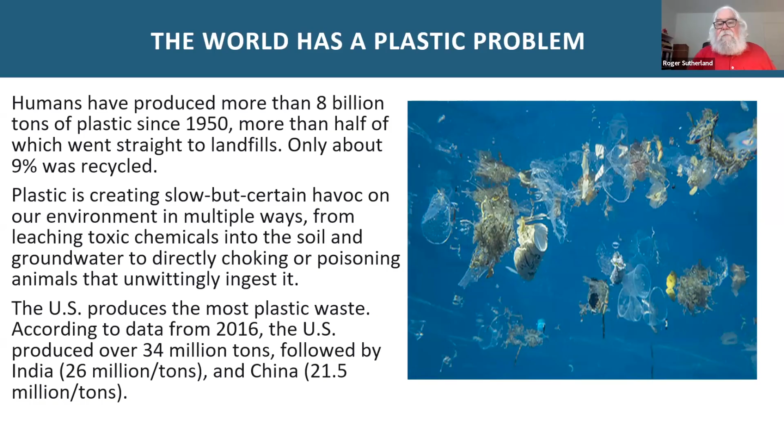Plastics are a problem not only because of the toxins they contain throughout their manufacture, but also the fact that they can be ingested by aquatic life and create all kinds of issues. What's really interesting is that the US produces more plastic waste than any other country - according to the data, over 34 million tons, followed by India and China.

There's a nice graphic of what the plastic looks like floating in the ocean. So there is not only a plastic problem, but the world has a plastic pollution crisis. Most studies report that people eat or drink an estimated 39,000 to 52,000 microplastic particles every year, and if we include inhalation, that number goes up dramatically.

Plastic accumulating in our oceans and on our beaches has become a global crisis. Billions of pounds of plastic can be found in swirling convergences that make up about 40% of the world's ocean surfaces. At current rates, this is just unbelievable - plastic is expected to outweigh all the fish in the sea by 2050.

So the next thing we need to do is ask ourselves: what can be done about this? Street sweeping studies over the past two decades have targeted a variety of pollutants found in our waterways, including nutrients, heavy metals, and toxics. We now have data suggesting we're doing an excellent job with all of these things.

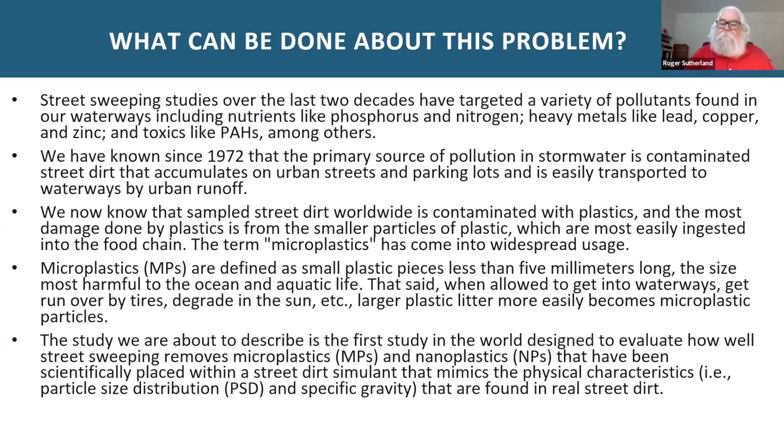So the study that we're about to describe is the first study in the world designed to evaluate how street sweeping removes microplastics and nanoplastics, which are smaller versions of the same, that have been scientifically placed within a street dirt simulant that mimics the physical characteristics found in real street dirt.

So before I get into the study, I just want to back up a bit. Ranger and I have done 2 other presentations at this event, this is our third. Now I want to refer back to the first one that we did in September of 2023.

I want everyone in the audience to understand that as far as I'm concerned, as far as the science is concerned, it's clear now. It hasn't been clear for 50 years, but it's clear that America's first line of defense for stormwater pollution abatement is street sweeping.

Now let's go way back 45 years ago when the Nationwide Urban Runoff Program, NURP they call it, started in the early 1980s. I was involved in 2 of those. They wanted to study, it's EPA funded, about $30 million, the effectiveness of various BMPs throughout the country to abate stormwater pollution.

And street sweeping was included. The way they did that is they wanted to look at whether or not it could reduce the event mean concentration for 5 pollutants of interest at 10 locations in 4 states: North Carolina, Illinois, Washington, and Wisconsin.

But it was the unexplainable negative results from 2 sites in North Carolina and 1 in Wisconsin that resulted in the conclusion, and I quote, 'street sweeping is generally ineffective as a technique for improving the quality of urban runoff.' They reached this conclusion despite the fact that the data clearly showed EMC decreases in 34 of the 50 site pollutant investigations. So it's been statistically indeterminate results that have hampered sweeping's perceived BMP value for stormwater runoff pollution ever since.

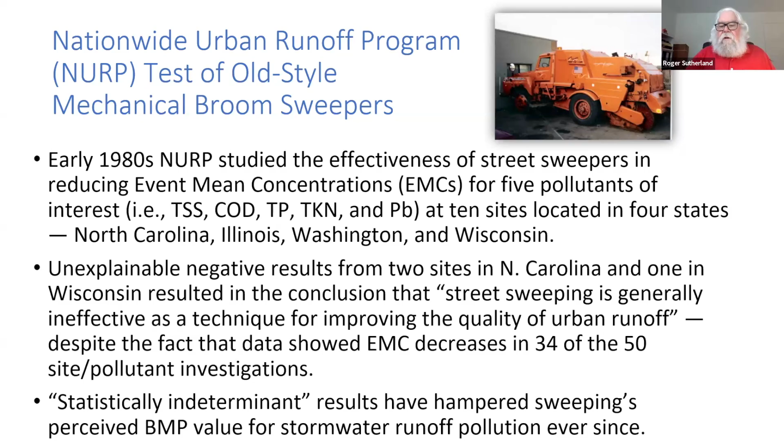Let's fast forward to 2010 with the City of San Diego's targeted street sweeping pilot study. They decided as part of this project that they were going to go sample some events, and those are the 3 events that they sampled.

But they were going to do something very different. Instead of going down the pipe quite a ways, they're going to collect the sample right where the gutter discharges to a stormwater inlet. So they did this, they captured 3 storms, and they were in 3 different situations: either the area was unswept, or it just had been swept by a mechanical broom machine, or it had been swept by a vacuum.

You can see the results in this analysis are very clear that TSS was reduced 74% by mechanical broom sweeping, 85% by vacuum sweeping. Their focus was heavy metals, as you can see, and so the metal ranges were impressive. They weren't as high as TSS, but they certainly were impressive.

And so when I saw this, I got so excited, because I've got a computer model, a simplified particulate transport model I wrote 30 years ago, and it was projecting these kinds of reductions. So I wasn't surprised at all, but apparently the rest of the stormwater community was.

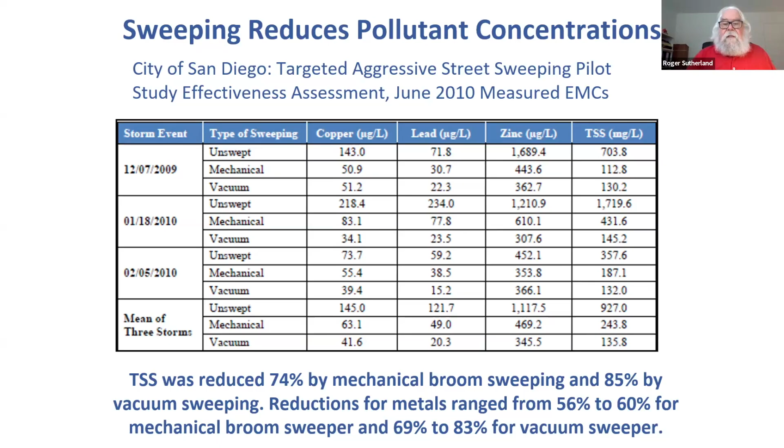So let's fast forward to the year 2019. This is the game changer. The University of Florida, in association with the Florida Stormwater Association, involved 12 to 14 Florida MS4s, and they found after a 12-year study costing a couple of million dollars for sure, that street sweeping was the best BMP, up to almost 7 times more cost effective than the next BMP for nitrogen and phosphorus recovery.

So what they decided to do, instead of trying to measure stormwater and all the problems associated with that, is measure how much contaminants the practices they employ pick up. They looked at sweeping, they looked at catch basin cleaning, they looked at a variety of structural end-of-the-pipe measures, and then they calculated the cost of capturing a pound of nitrogen or a pound of phosphorus across all of these recovery measures.

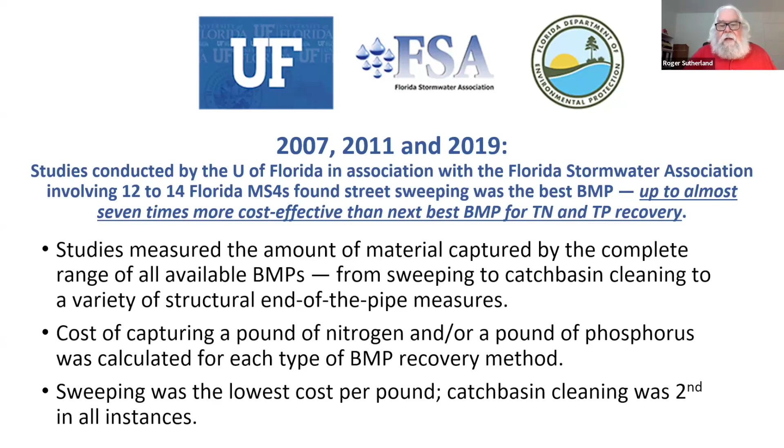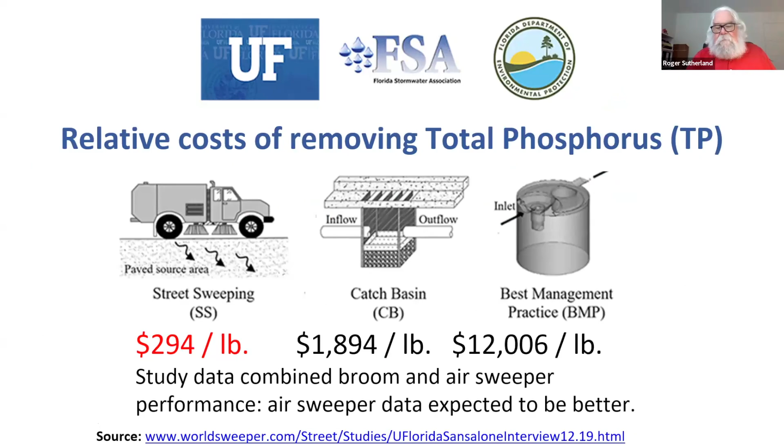But let's get right to the point. The Florida studies found street sweeping to be the most economical and dominant practice that MS4s could implement and optimize in order to maximize nutrient and particulate material (PM) recovery benefits.

And they came to this conclusion without even separating the mechanical broom data from the air machine data, which makes it even more significant. I'm sure they would have seen the air machines were even better than the broom.

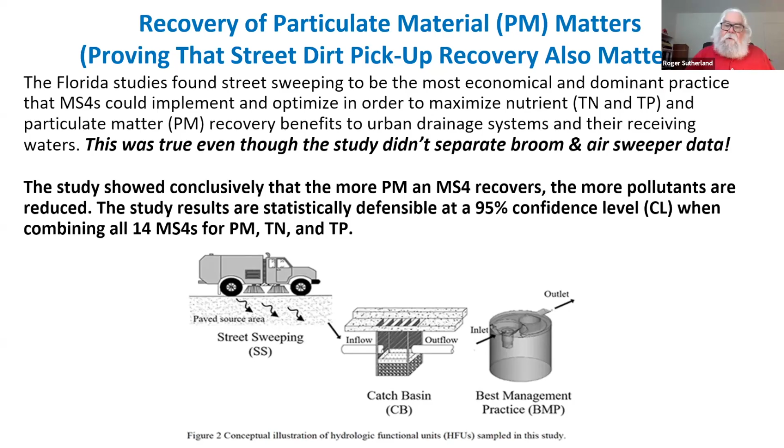The bottom line is the study results are statistically defensible at a 95% confidence level when combining all 14 MS4s for PM, TN, and TP. That conclusion has never been reached on a comprehensive street sweeping study because of the costs involved.

That's why we're so excited about looking into street sweeping. I'd like to once again focus on the project. City of Santa Barbara is leading it, funded by NOAA through a Sea Grant, with the University of California, Santa Barbara participating.

Ranger and I are also involved. I want to give a special thanks and shout out to Los Angeles Sanitation for their generous coordination, support, and willingness to provide us a location where we could safely do this work—the Donald C. Tillman Water Reclamation Plant, this past July.

So what are the objectives of our testing? The number one objective is how well street sweepers remove micro and nanoplastics from the gutters of streets, where they're known to accumulate. Folks, 90% of the material that accumulates on an urban street is within 2 feet of the gutter, and even greater where traffic is heavier.

We want to determine whether this removal of plastics is a function of the speed of the sweeper, so we have two speeds. We also want to know if it's a function of the different types of sweeper.

We have the mechanical, or what's referred to as a broom sweeper—but don't confuse that with gutter brooms, because all good sweepers have gutter brooms. The other two choices are regenerative air or vacuum. We want to see these technologies operating at the same speed.

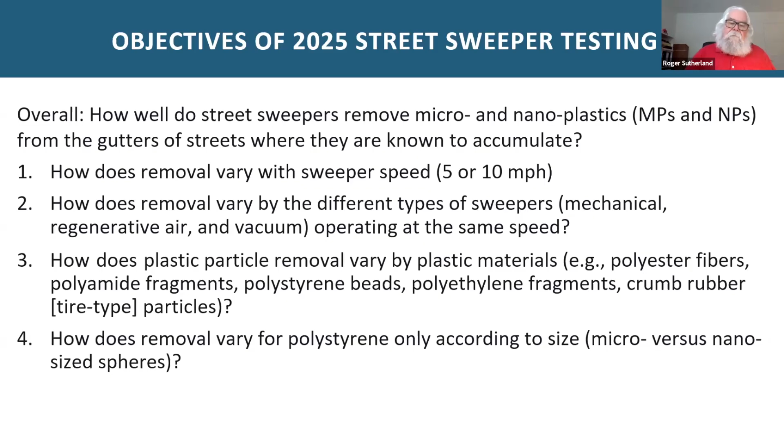Most importantly, we want to know how well the plastic we've incorporated into our test is removed. And we have both a nano-sized version and a micro-sized version of the polystyrene, so we want to evaluate that too.

Here are the plastics, and in the right corner of each photo is the source of the plastic. We'll talk a little about how they created this, but you can see the microscopic view of the plastics. There are 5 different plastics involved.

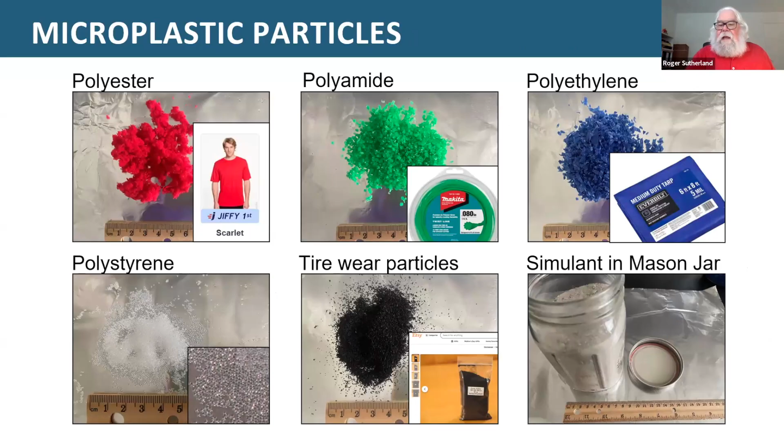Later we're going to show a video. I keep saying there's 6—that's an error. And on the lower right, we have some simulant in the mason jar.

So let's talk about the methodology—how did we do this? First off, we need a clean track. Initially, before the first test, we cleaned it with a street sweeper and then blew it with a leaf blower.

Subsequently, after every test, we did not bring in a sweeper to clean it, nor did we vacuum it. We basically just used the leaf blower.

What we do is dispense a known quantity of material. We ended up with about 634 pounds per curb mile of artificial street dirt, created by the University of California at Santa Barbara, spiked with microplastics, and placed in a 50-foot by 2-foot wide test track by sprinkling it on by hand directly from the jar. If you look at the photograph in the lower left, you'll see that occurring.

Now, this is a departure from the protocol I established almost 30 years ago, where I always used a fertilizer spreader to put it down. The reason we went away from this is because we were concerned about the plastics getting gummed up in the mechanism of the fertilizer spreader.

Once that's done and everything's prepared, as shown in the second photo, then we conduct a single pass of a sweeper at a targeted speed. We've worked with this operator, giving them a couple opportunities to get the timing right without necessarily sweeping the curb. But when it actually occurs, I'm using a stopwatch, and I know exactly how fast they're going.

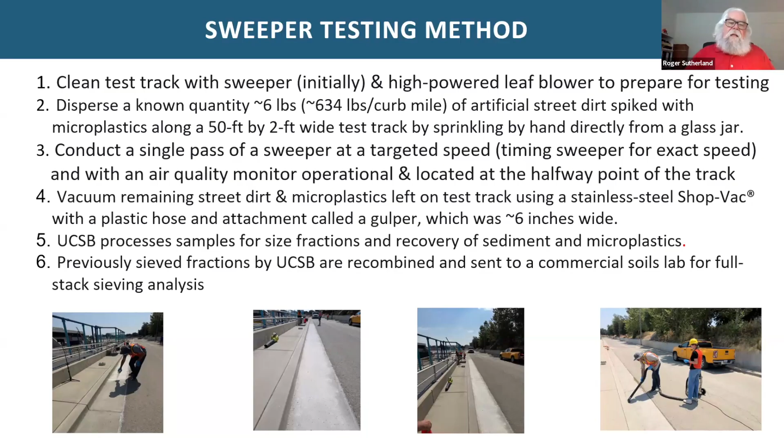We had some concerns about this, as to whether it was going to contaminate our samples. The university conducted some tests previous to this, because they had the equipment, and they concluded that wasn't an issue in the process. Then, of course, the university will process the samples. We'll talk a little bit more about that later.

So, this analysis is underway. I don't have any data I can share with you on particle size or plastics yet, but I do have some mass data we can talk about.

The first thing they're doing is recovering this simulant. They're sieving it into 5 fractions, and then they're going to examine it via microscope and count how many plastics are left in each of the sieve fractions. That's very labor intensive and tedious, but it turns out, as you'll see in a minute, it looks like it's going to be pretty accurate.

Once we have that, we're going to compare it to the known quantities, because they know exactly how many plastics they put in and where they were associated in terms of size. Then, with all of this data, we'll be able to evaluate whether speed is an issue and how the different types of machines did.

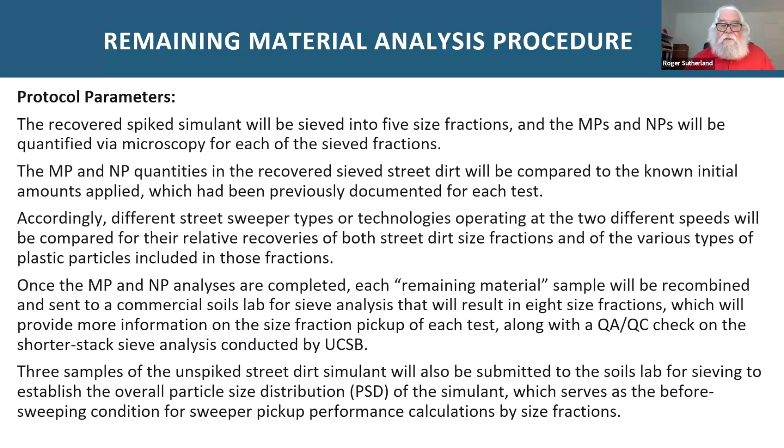Once they do their work, the University of California, Santa Barbara will recombine each fraction back into the original 14 samples we got, and send those remaining samples off to a commercial lab for a full stack sieve analysis. We'll also send 3 samples of the unspiked simulant to get an idea of the actual before condition, how much they put down in terms of particle size distribution.

This is a quick slide to let you know we used Los Angeles Sanitation's recipe, which was designed with my collaboration by Larry Walker and Associates a couple of years ago. There's a presentation on that at this very event. We got the material they used to create their simulant.

We had to augment it with one other thing. I think I say there's 6 ingredients, but there's actually 7. Anyway, there are no standard methods for microplastics, for how you put microplastics into manufactured street dirt, so they had to come up with that. The university had to come up with that.

They did an extensive literature review. They collected street dirt in the city of Santa Barbara and analyzed it. They ended up shredding that material you saw in the previous graphic using a coffee grinder to get it to the right size. Then they tediously put in the exact number of plastics in each of the size fractions they determined through the literature and their own local work.

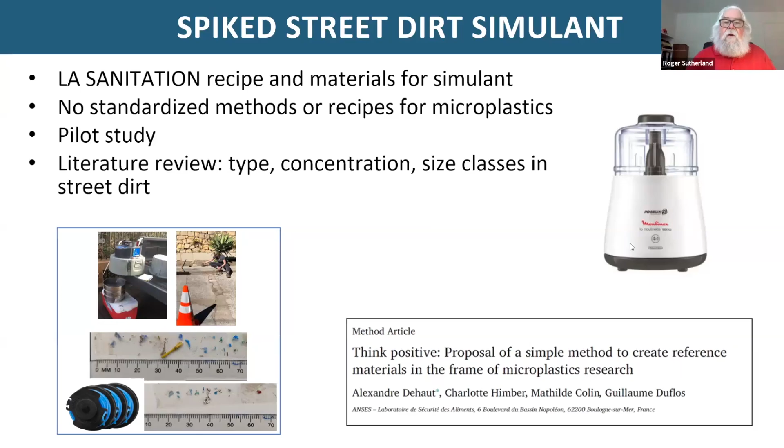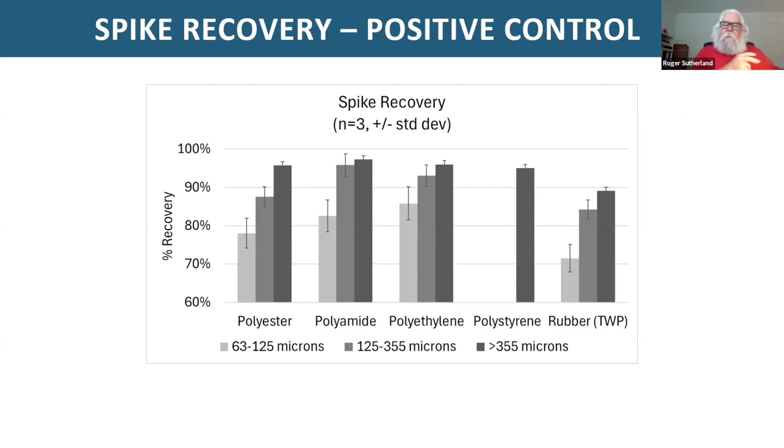When you're establishing a new methodology, you have to have some level of confidence it's working, so they did a spike recovery analysis. They created this material and then determined whether they could count all the plastics they put in, to make a determination of how much they recovered. This graphic shows 3 different particle size distributions and their recovery percentages. Even the lowest percentage was 70%.

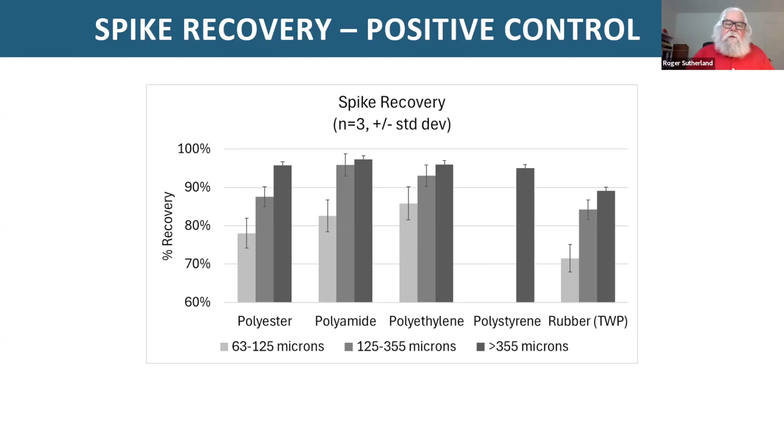What's really interesting is that if you look at the research data on real street dirt, we're not finding very many microplastics in the finest portions of the street dirt, which is completely reversed from other pollutants, like metals and toxics, and nutrients that we've been looking at and associating with street dirt.

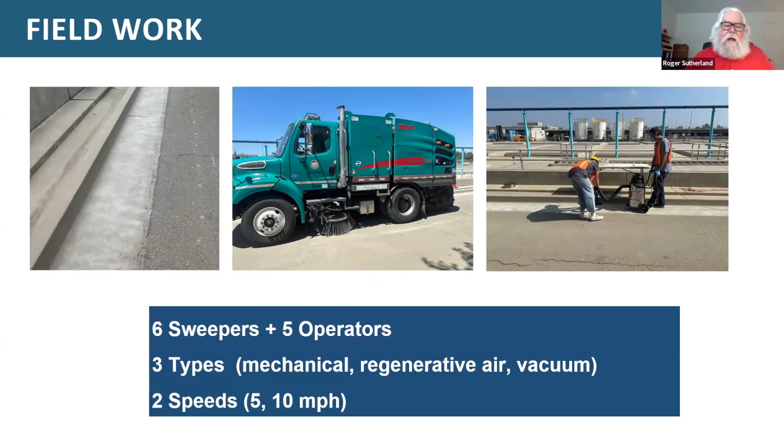Here's a summary: put the material down, sweep it — that's actually Elgin's Broom Bear — and then pick it back up. We had 6 sweepers, 5 operators, 3 types of machines, 2 speeds, no waiting.

Here's a summary of the results, a box and whisker plot. You can see the range of pickup in terms of mass only was 63 to 98%. We had multiple operators, and you'll notice quite a bit of variation for the sweeper speed at 10, and then for the two sweeper types, mechanical and regenerative.

You might ask why that's happening — look how tight the vacuum results are. Well, that's happening because of operator error and machine age. I'm going to talk a little bit about this. Like I said before, I've got no information yet on size fractions and microplastics, but that's coming.

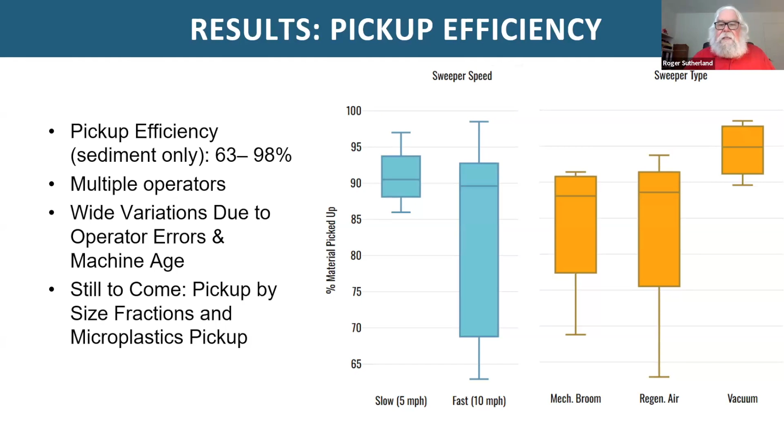So anyways, here's a table of all of the data that I wanted to summarize for you for this presentation. We did 14 tests. We wanted 4 tests a day. We have the sweeper model and type noted. We have the targeted speed, 5 or 10 miles per hour, but we have the actual speed.

You can see that some of them were having difficulty hitting, especially the 5 miles per hour, which really begs the question, why don't we have an odometer in a street sweeper that can be accurate at such a low level? That's where we should be sweeping, as most of you probably know.

Any case, that's how much material we put down the column, and then that's what we sucked up, the vacuumed up. Now I've got a comment section, and I've highlighted some of these comments because I want to discuss them briefly before Ranger is going to show you a video of this entire operation. And then he's going to present a few additional things.

Anyways, what is a full gulper width? Remember I mentioned the gulper is the attachment at the end of the hose that we're using to pick up the remaining material. Well, that gulper is about 6 inches wide.

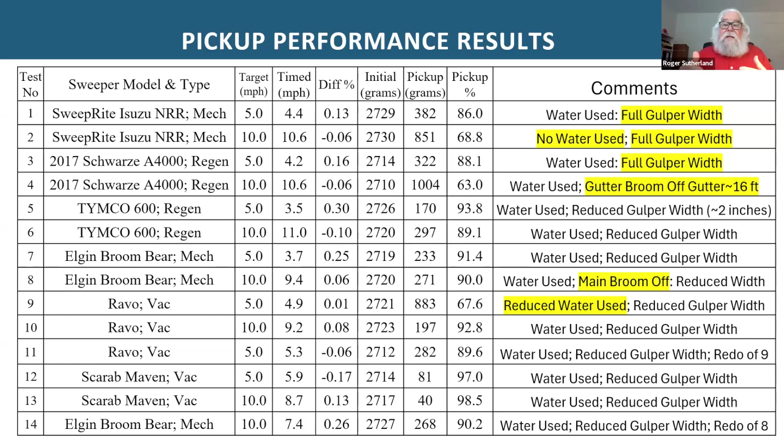And one of the things Ranger noticed, by the way, and pointed out on the morning of the second day, is that he thinks we're not getting as much of the remaining material as we could if we reduce the width of the gulper. So we made a command decision and reduced the width of the gulper to about 1/3 of what it was before.

So that's why when I say reduce gulper width - everything else, all the other tests, unfortunately we could not do it for the 2 machines we saw previously, but we'll have to make some sort of adjustment in their pickup performance to account for the fact that it made anywhere from a 2.5 to 4% error. I did not think it would be that great, and I was proven that wasn't the case.

The other thing is, I mentioned the wide variation. Why was that happening? It's operator error. See test number 2, the SweepRite mechanical.

For whatever reason, the operator did not turn on the water. We are using water - that's pretty standard practice. In the past we've never used it very often, but we realized we need to do this now. So they didn't even turn their water on, and that demonstrates why that number is so low.

I mean, you would say, wait a minute, doesn't water stop the pickup process? That's what we've seen in the past in very humid conditions. But when we're in arid conditions, it looks like it goes the other way, and the water actually seems to assist in that pickup process. See, you do these studies, you learn something new.

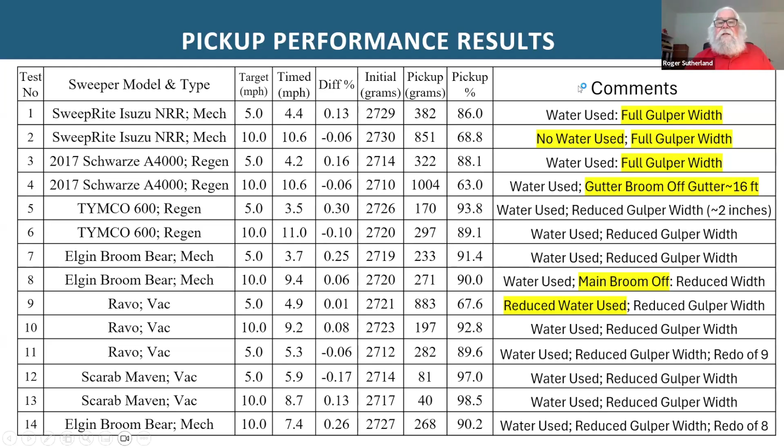One comment on the broom bear: when he ran the test without the main broom operating, the curb broom, or gutter broom, moved most of the debris into the path of the main broom, and it just got smeared along the part that we didn't vacuum up. So it showed the same amount taken out of the gutter, but that debris was just left on the pavement. Of course, that's not a good situation.

Here we go with the video that we did. We did one of these pretty much with each of our machines for the people involved in this testing. Here we go.

So here's day 4 of our test process, and day 3 of the actual sweeper testing. It took all day the first day to get ready for the testing process. This is Roger Sutherland, the most noted sweeper tester in the country, probably the world, who's here co-leading this testing process with myself through the City of Santa Barbara.

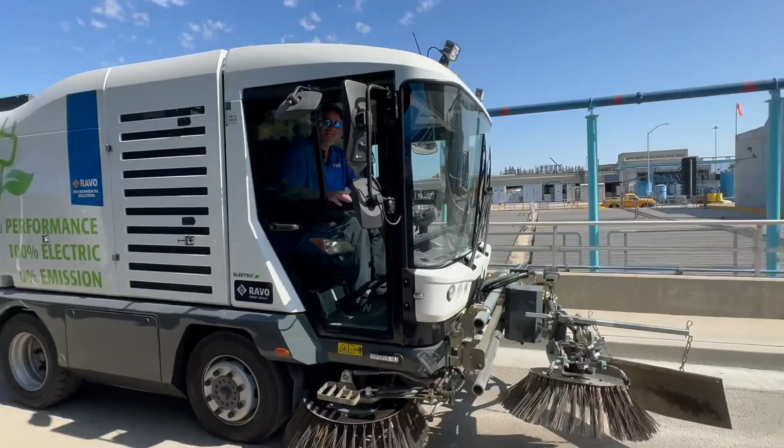Today the Ravo machine from Fayat is going to be tested. They'll be here, able to turn around, then we'll have to go.

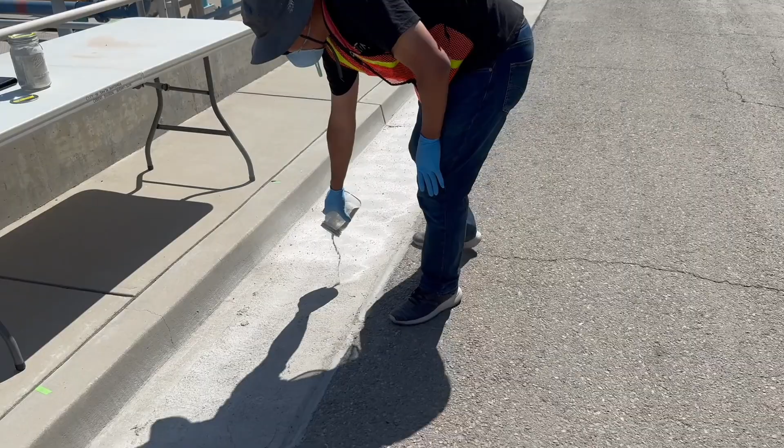I'm documenting that Dr. Lee is putting this down. So we're talking to Matt from Fayat and Ravo in this instance.

Matt, as the operator, you've done a great job hitting your times. You got a chance to see your 5-mile-an-hour results. What changes do you anticipate the sweeper needs for the 10-mile-an-hour test? Well, first of all, 10 miles an hour, in my opinion, is pretty fast for sweeping. Really, for this pass, from what I learned from the 5-mile-an-hour pass, we're just going to crank everything up. I'm going to use more water on my curb brooms, a little higher fan speed. My broom speed is turned up, pretty much maxed out. The idea on this run is to basically get as much broom contact with the concrete as we possibly can, while moving at such a high speed. So with any luck we'll get all that material moved into the middle of the machine, into the path of the suction nozzle and up into the hopper. It's the expectation, but that's why we're testing - we're going to show that 10 miles an hour is too fast to sweep in this game.

Yes, that's your agreement coming into this too? Yes, and normally with Ravo specifically being a vacuum machine, you've got to give them time to do their job. So usually, even on a relatively clean area doing cigarette butts and litter, somewhere around 6 miles an hour is probably about as fast as you want to go. Otherwise the machine's moving too fast for the brooms to do their job. So it'll be interesting to see, cranked up here, what we can do at 10 miles an hour.

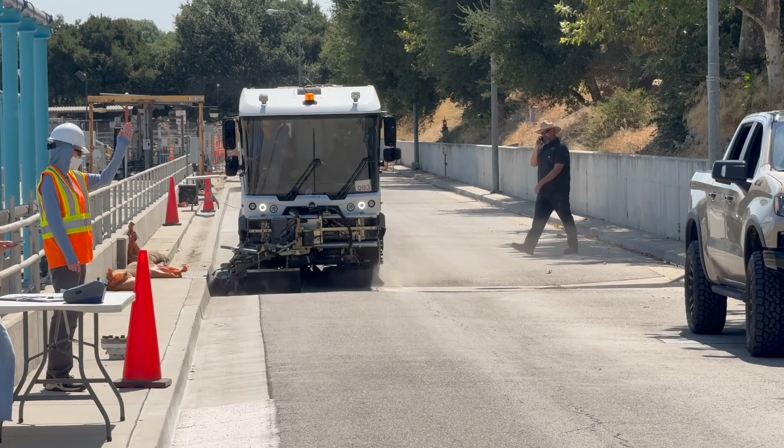Well, let's go see, we're going to find out. Ready - this test is of the Ravo machine at 10 miles an hour. About to hit the cone right about now.

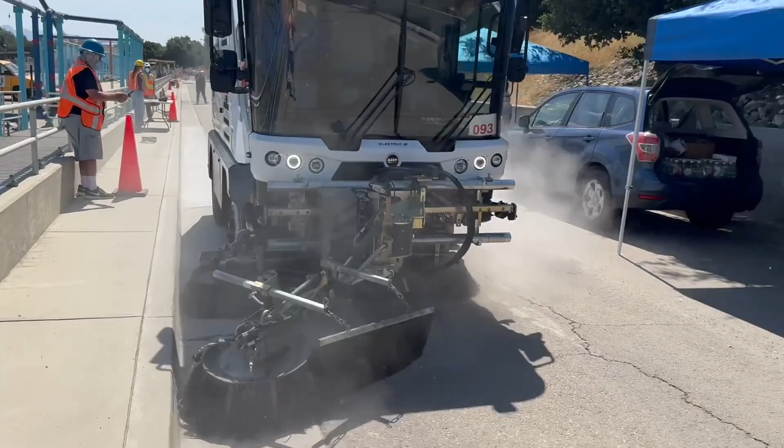Carlos is a representative from the City of Los Angeles, who we're very grateful to for letting us use this facility for our testing. And Dr. Lee is involved in sifting the material and coming up with the data that we'll have.

We have two tests here - the first national sweeper test in over 25 years. What we've done is a 50-foot test run at 5 miles an hour by this machine, on a 2-foot wide strip of simulant - a non-toxic simulant of street dirt with microplastics in it. The idea of this study is to see whether sweepers can remove microplastics as well as other street dirt, and how well they can do that.

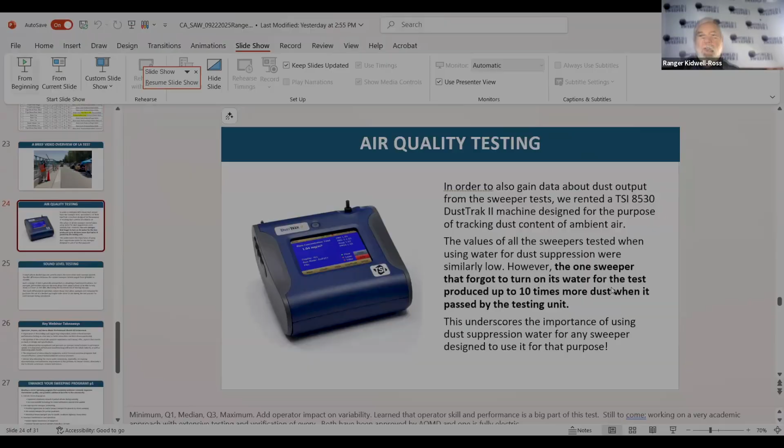Roger is going to share his screen again, and we'll go through the rest of our presentation. We wanted to show that we also tested air quality.

For that, I contacted the South Coast Air Quality Management District, which over a quarter century ago conducted the last real sweeper test that made a big difference in terms of what machines were available for sale in the Southern California region, as I've reported on - I was at that test also. But every sweeper tested at that time passed. They found a way, mechanical or air, it didn't matter - in some cases they added more water quality or dust suppression nozzles and so forth. So they all passed, and that's been an albatross for us ever since.

But I did consult with them, and we tried to get them involved. We were unsuccessful after multiple tries - they cited manpower and funding constraints at this moment. But we did get a recommendation for the kind of dust monitor we should use.

You see the DustTrak II that we use - we rented it for the week, and it's really indicative of what using water for dust suppression actually does, because the data shows that for one sweeper, where the operator forgot to turn on his water, we had 10 times more dust. So that's exactly what happens, and that's why it's so important, if you're out there street sweeping, to make sure - even with the expense - that you keep using water.

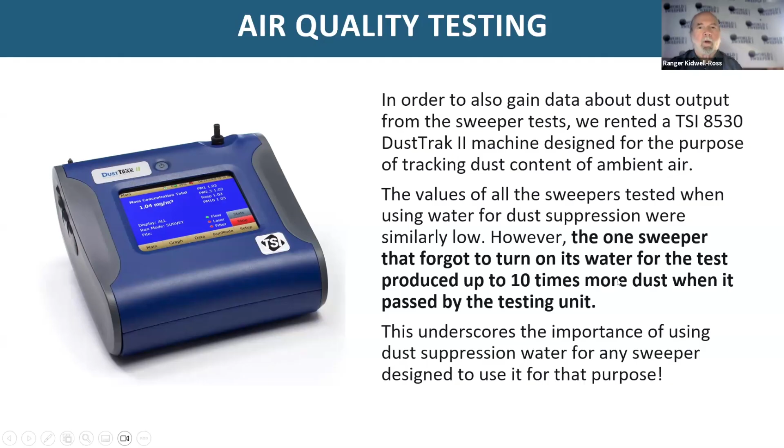So they all passed, and that has been an albatross for us ever since. But I did consult with them. We tried to get them involved; we were unsuccessful after multiple tries. They cited manpower and funding constraints at this moment. So we did get a recommendation for the kind of dust monitor we should use. You see the DustTrak II that we used. We rented it for the week, and it's really indicative of what using water for dust suppression really does, because the data shows that one sweeper, where the operator forgot to turn on his water, produced 10 times more dust. That's exactly what happens, and that's why it's so important if you're out there street sweeping to make sure that even with the expense, you keep using water.

We also tested the sound level of the different sweepers, and that's something I want to encourage all of you MS4 representatives and stormwater representatives to do. When you're testing and specifying sweepers, coming up with the one that you want to use, do a sound level test as well. You can get a free app on your smartphone that will test that by decibels.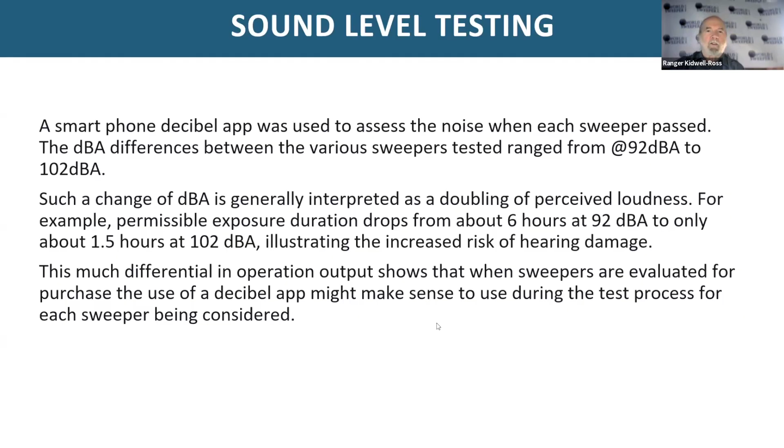And showing this, you can see that the differences range from 92 dBA to 102 dBA. So you might think, oh well, that's only 10%. How could it matter? Well, that's a doubling in the dBA system of perceived loudness, and the permissible exposure at 92 dBA is about 6 hours. At 102, it's only an hour and a half. So when you evaluate your sweeper, be sure to use a decibel app just so you have that information, and it can make a difference for the community and how much noise they're being subjected to as the sweeper goes by.

I'll do a sub here on the process of getting these sweepers for our testing. It was onerous. For whatever reason, the manufacturers, with the exception of the largest in the world, Fayat, and SweepRite, which is also out of the United States, they are based in Canada, although now have a factory in the United States, and they are in the process of...

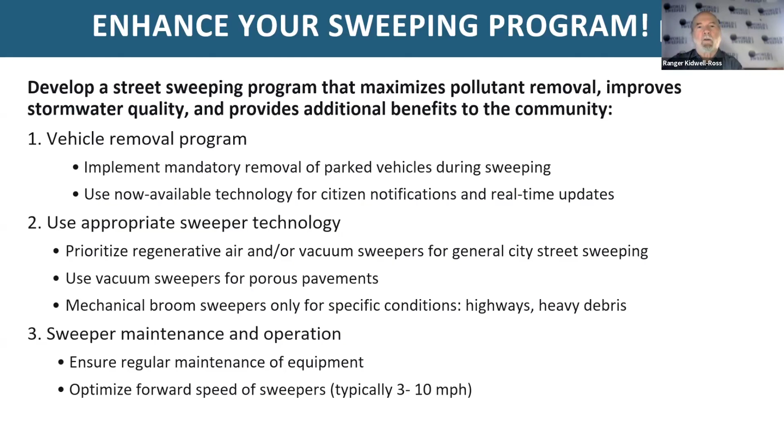Now, using the right kind of technology is very important. In general city street sweeping, you do not need a broom sweeper. You need to use air sweepers, regenerative air and vacuum sweepers. It's just better to do it that way.

Now, optimizing your sweeping frequency: adjust the frequency based on what you want to be doing in that area. Do you have runoff to waterways or not? You want more frequent sweeping in high accumulation areas and so forth. Obviously, if you swept once a year, you're going to have a huge amount of pickup. If you swept once a day, you'd have almost nothing, but you'd have basically the same cost of sweeping.

Figure out your sweet spot for how often you should be sweeping your different routes. Pavement condition is a huge indicator of how well a sweeper can do, since material can stay down in cracks. Focus on curb streets, where material collects against the curb and you get a chance to pick it up. You have to pick up large material on highways, and that's where broom sweepers come in, as well as construction sites. Get the cracks in your poor pavements sealed.

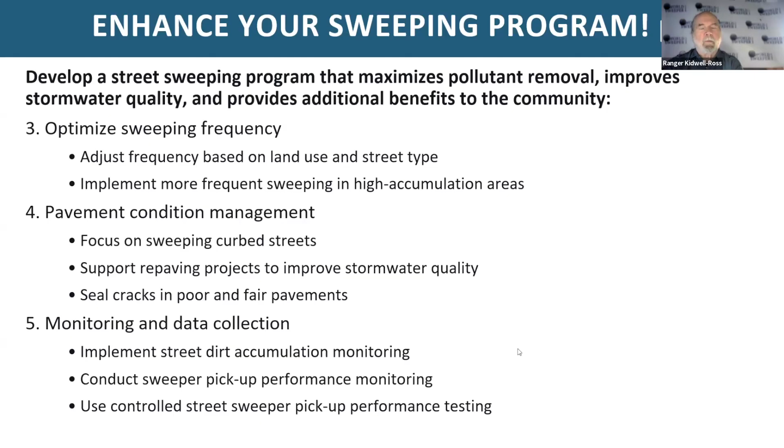Monitor the kind of material you're picking up. Why not keep track of what the sweeper can do? You can find out by sampling what kind of pollutants are in the material coming off your streets, so you'll know how much material and how many pollutants you're picking up.

Roger talked about his simplified model. It's great to tell you exactly how much material you might expect for washoff. It can go back and look at your rainfall rates across the board, historically, and tell you what to expect by sweeping.

Now you have data-driven insights to allocate your resources. I've long recommended adding your sweeping program to the stormwater department, since they often have a larger budget these days. By combining that, you're fighting your stormwater pollutant issues together, you can combine your budgets, avoid infighting, and be better equipped for analysis.

Another thing about sweeping: it's onerous for people to move their cars, and it's very important to make sure they do. But now we can make it easy for that.

Educate your citizens about the value of sweeping and what we're doing here — we're improving our environment in significant ways. We recommend putting hopper graphics on the side of your sweeper if you have a big billboard, and having some of those graphics aimed at a 5th grade level. Have a contest for graphics and education, teaching kids to tell their parents what's really going on, through school education programs and so forth.

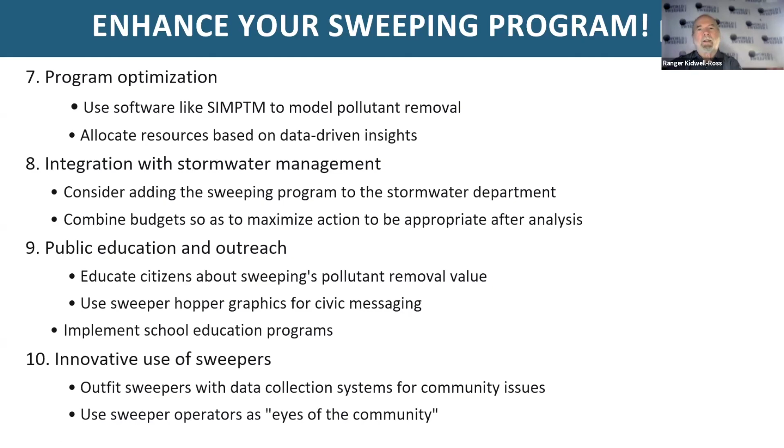Number ten: outfitting sweepers with data collection systems for the community. There's technology out there that's been tested and works — you can add another camera, or maybe combine them, though you'd likely need a secondary camera. Through AI, it can notice overhanging branches, signs that are down, or pavement with emerging potholes. It takes photos, adds a GPS stamp, and sends it to the appropriate department to fix, so you get things done earlier than you might otherwise.

Your ticketing system — camera-based ticketing — is great. It costs less and is more effective. The person who gets the ticket has the photo from the sweeper, so there's no contesting it, and it also allows people to park right after the sweeper goes by.

In terms of regulatory alignment, work toward what places like Florida have done, where you have state-level regulations that give you credits for the amount of pollutant you've taken off your streets and out of your environment. It's a real incentive to sweep more.

Things are moving pretty fast these days, so stay informed about whatever new technologies can bring you, from AI onward, and what your best practices are. Then participate in or follow the results of whatever research and testing you might get involved in.

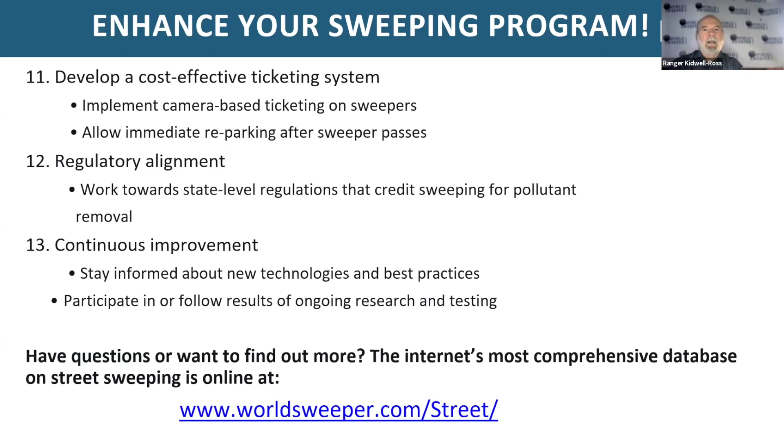We are the largest information resource for street sweeping on the planet. I've put the address you can go to, to see all of the different categories we cover, at the bottom.

If you ever have questions — Roger and I were both born in 1950, and combined we have about 100 years of experience with street sweeping. You need to get us while we're still around on the planet and ready to help, and we are. So that concludes my side of the presentation.